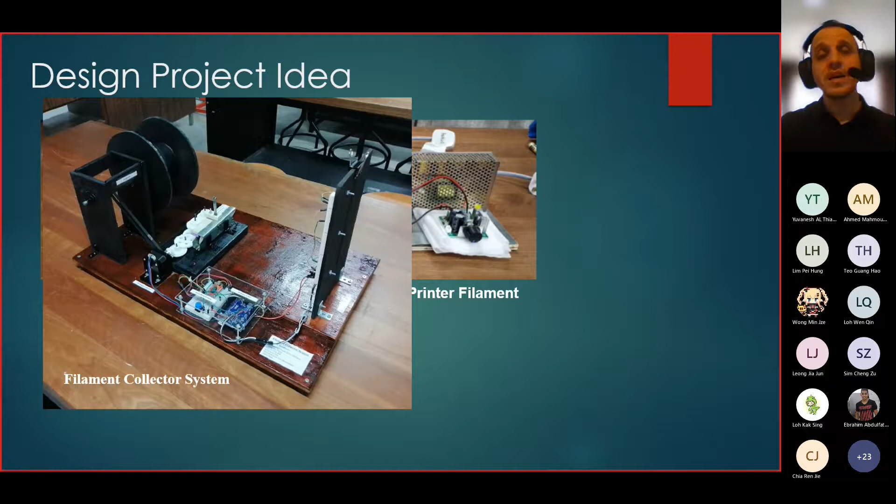Then we are going to replace it by another kind of cylinder. After that, we came out with the idea about the fireworks - this one came out when the fires happened in Australia, California, and several other cities in the world. So we needed to think about how we are able to control the fire, whether it happens in the home, in the jungle, or in other kinds of areas.

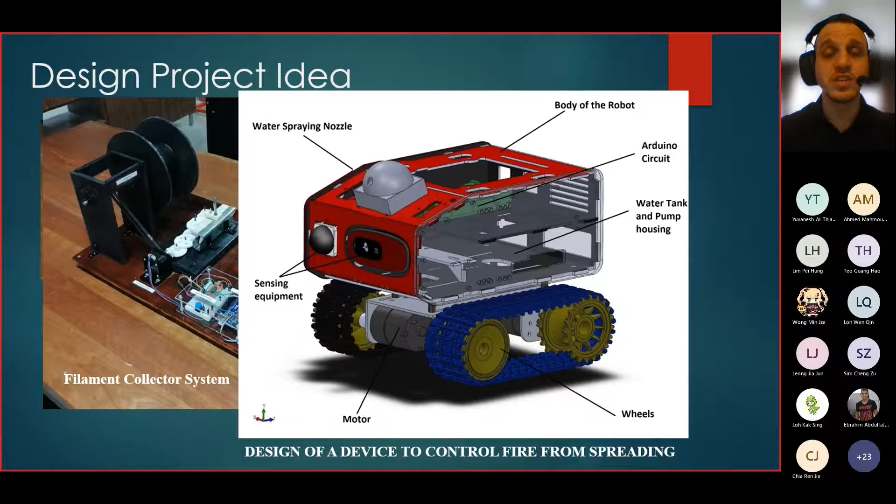So this kind of project, our industrial panel really liked it. They commented that this is a really complicated machine, and they are happy to see this kind of idea being run in one semester by our students.

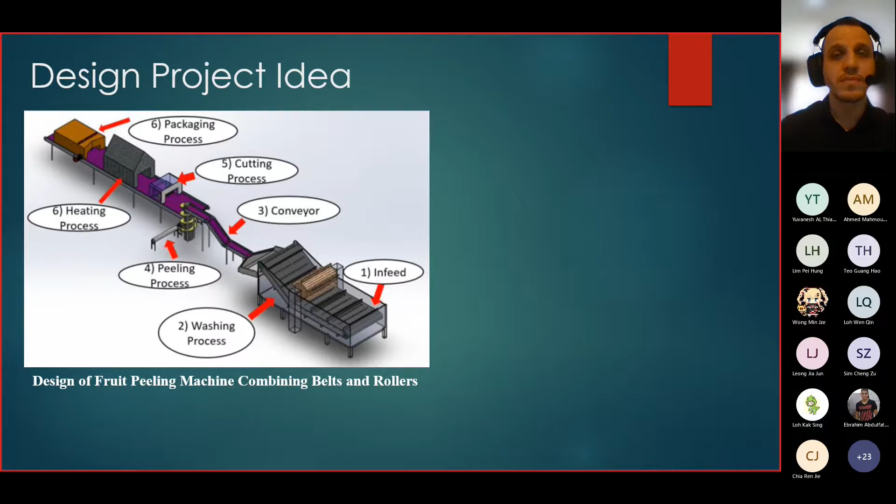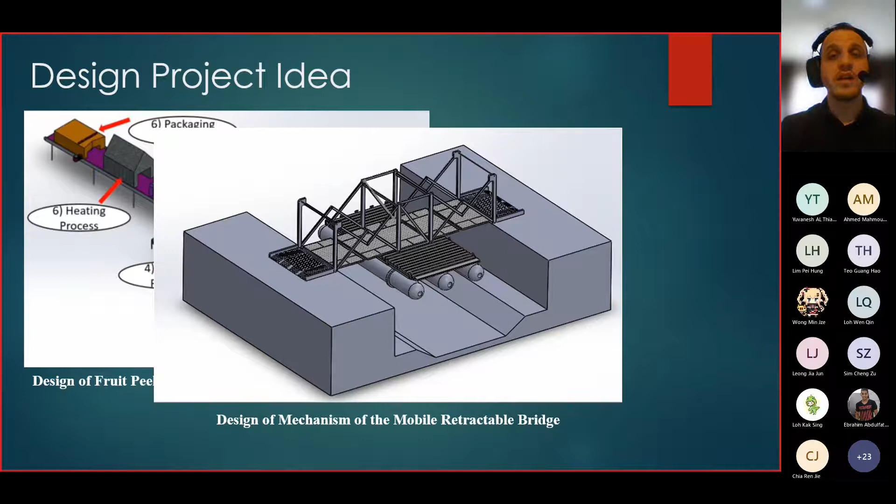Other than this, we found some organizations that were requiring designs from our university. This is the only design, the first one, which started last semester, where we came out with a real model for a real problem that this kind of organization was facing.

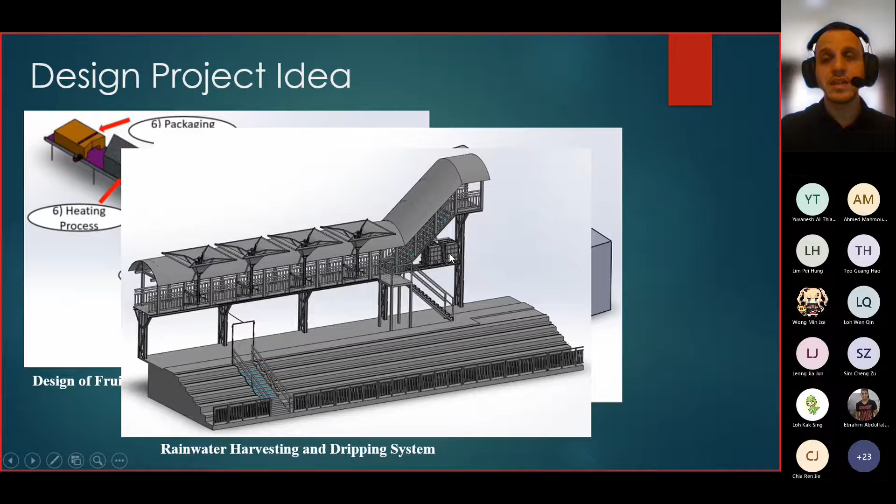So several designs came out from the students. One of them is an umbrella to collect water from the rain, and some came out with lines to be allocated beside the bridge to harvest all the water falling on the bridge. At the same time, this water is placed into two tanks, and at the end it's supplied to the land by a dripping system. So this is another idea, another design, as I mentioned. We got several designs and ideas, and the organizers were very happy with what the students came out with after completing the whole project.

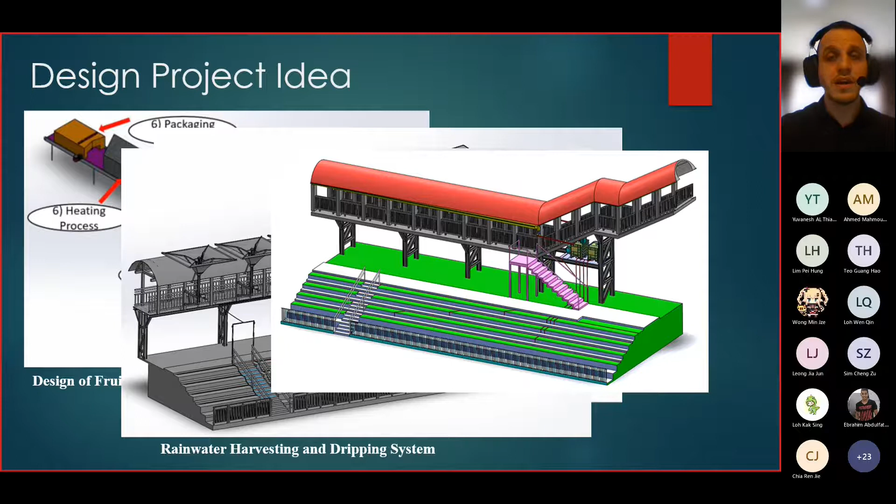After this, I'd like to show you some videos of what the students have done before. Later on, we'll explain the idea of the project and how students need to think between design, research, and several ideas. So let's start with this video. This one is about controlling the fire - sorry, before I start, this project is to control fire in the jungle or in the woods. All right, starting from the beginning.

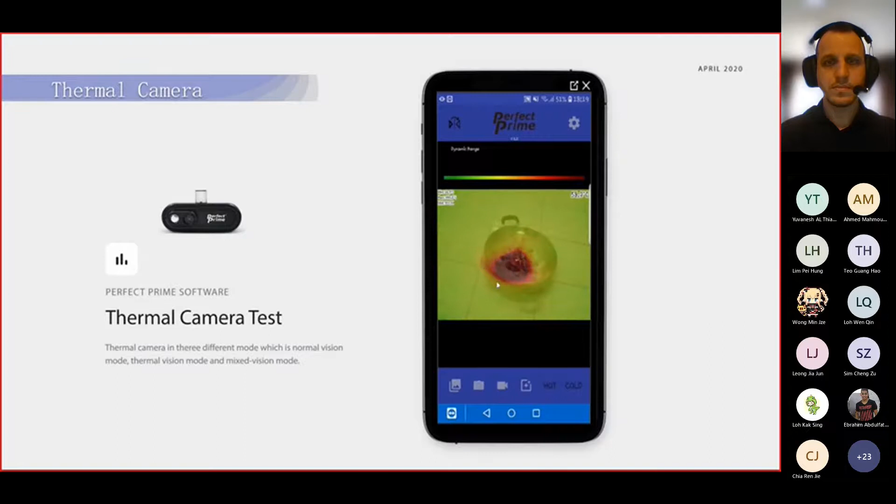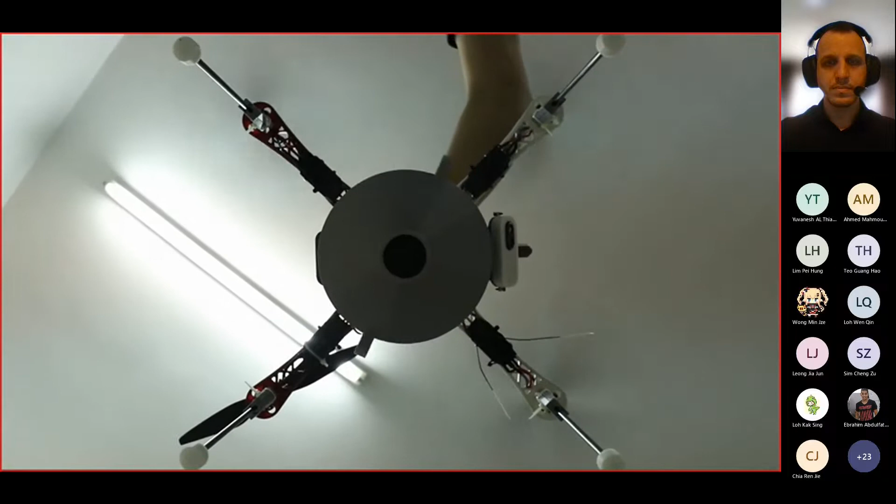This project was implemented in January 2020, before COVID started. During this semester COVID started, which was in March. As you noticed, there were only 2 students who came out with a prototype. Usually we ask students to come out with a prototype, but due to COVID-19 we stopped using prototypes in the design project and moved everything to simulation and modeling during the MCO. So there were only 2 students at home, and they managed to get all the product and came out with a design.

This design was more than expected, because the students came out with several ideas - they came out with 2 designs. One of them, if you notice here, let me go back.

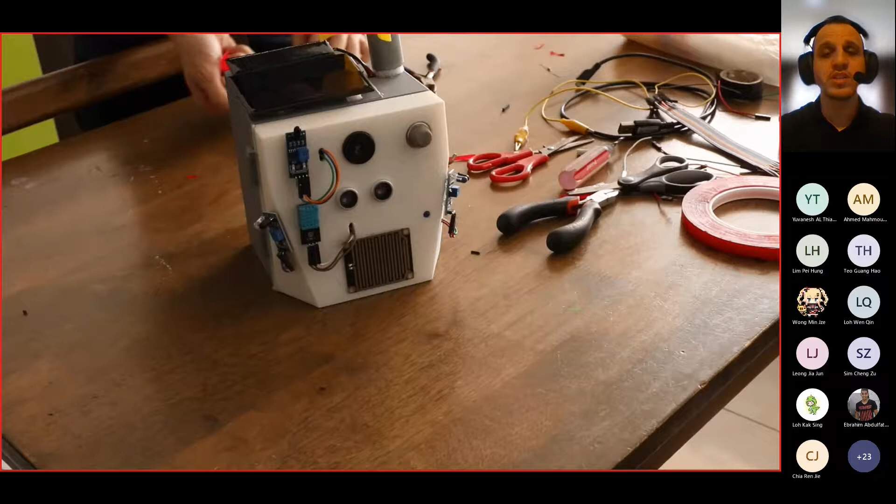This device is supposed to be allocated on trees to detect fire. After the fire starts being detected from several sensors, the firefighter, who is sitting a little bit far from the woods or jungle, will send the drone to the location of the fire. Then they will detect everything about the fire using the thermal vision camera. This way we may be able to control the fire in the whole jungle and solve the problem by saving the jungle and the people inside the whole area.

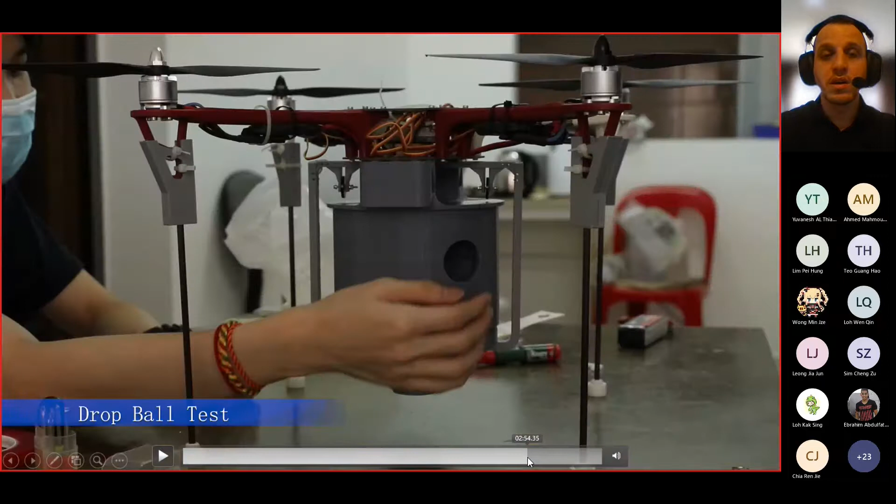This project was implemented beginning as mechanical parts, and step by step it's been converted to multidisciplinary - we came out with mechanical and some electrical sections, because we had to find coding for the sensors and so on. The students achieved a good goal for this project and came out with a great design. This device is supposed to be attached on the trees, as I mentioned earlier, so we may be able to transfer the drone to the jungle or forest. This is the great design we found from the students, and they really achieved the goal, more than their expectation.

Another design, from another semester, is about the retractable bridge. So let me show you the video.

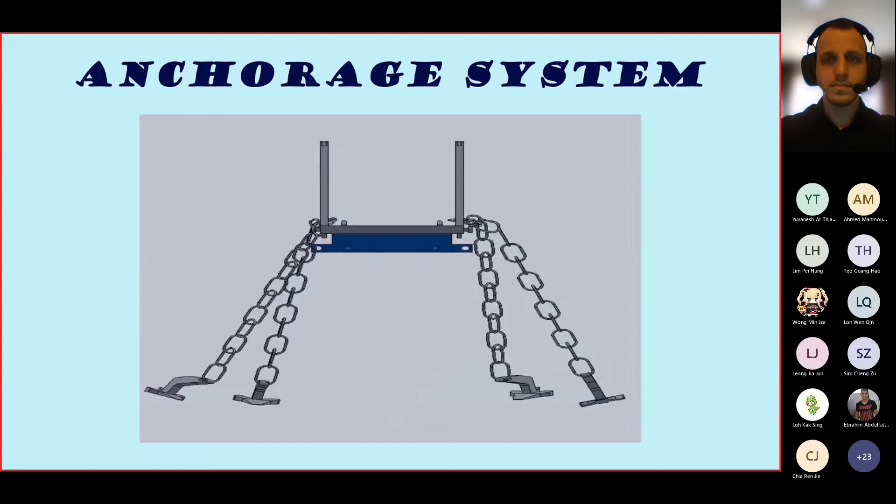This is one of the projects that has been applied to rescue people from the flood. And if you notice here, we have applied all the SOPs regarding COVID-19. So we need to find out how students are supposed to apply this information by applying sanitization on the bridge itself, then at the same time detecting the temperature for each person before crossing the bridge. We also need to provide social distancing between each member or between persons for the citizens.

In this part, you can notice that we are able to rescue the cars and at the same time rescue the people by applying this kind of bridge. This idea also came out at the department level, as we mentioned earlier.

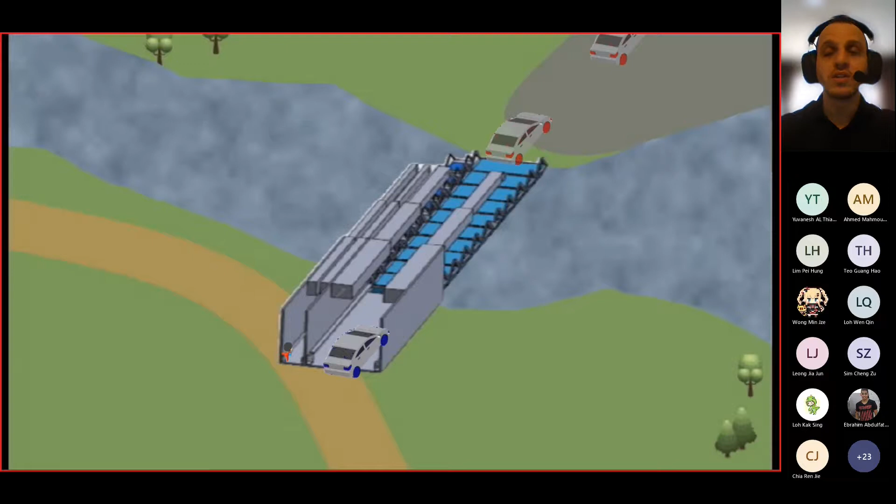The students achieved the goal with this design, and they managed to solve the problem with this kind of retractable bridge, because we may be able to use this mobile bridge from one location to another instead of applying a bridge on one side and then needing another bridge on another side. This idea really helps to move the bridge from location to location and helps save costs for the government or society running this kind of design. Other than this, we have another project regarding the peeling machine.

I'll just leave you with the video.

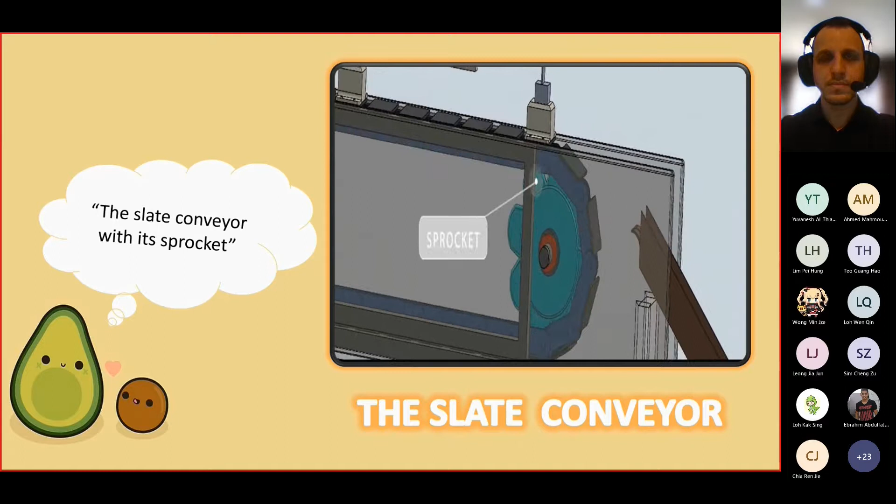This project was done in 2020. The students came out with several designs. Multiple groups came out with several designs because we had a lot of students, so I believe our groups were around 8. Each student selected a different fruit.

If I'm not mistaken, Mr. Renji is with us today. One of your seniors came out with one of the designs for this project. If my memory serves, they came out with an avocado machine, a peeling machine.

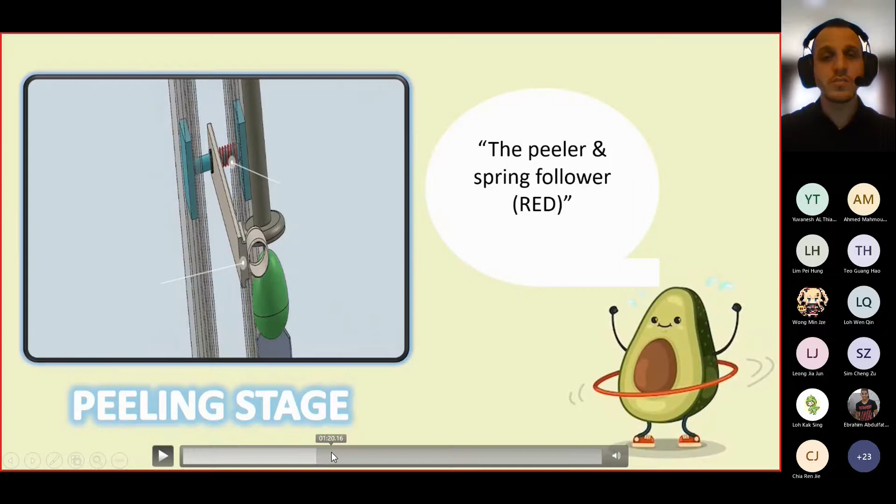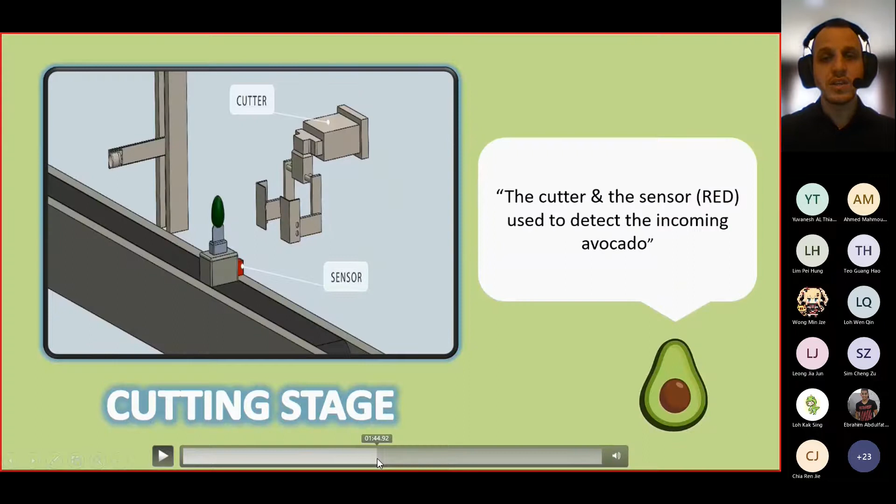This kind of project has several stages, as we mentioned earlier. As we explained, it starts with washing, then moves to the loading stage, then moves to cutting and peeling. Then after that it moves to the cutting area, then removing the seeds, then moving to packaging. So all of this comes out as a factory outlet for peeling any kind of fruit.

This project really achieves the requirement of the idea from the students. Definitely, they came out with several designs - every group came up with around 3 or 4 designs. Then at the end, they selected the best design, and from this they managed to show the idea using this kind of video.

Now I'm going to move to the last video and explain the ideas here. This project is the latest one, happening in May 2021 - about community service for the Mid Valley area. I'll leave you with the video.

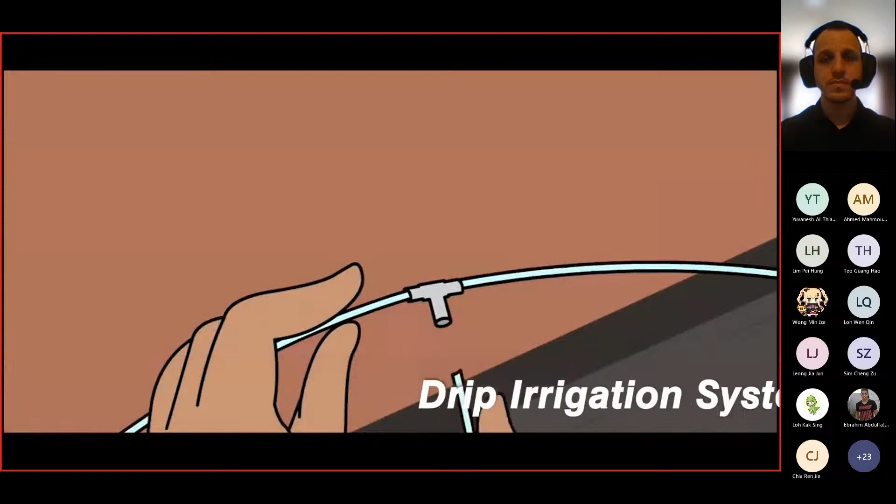Hi, today I'll be presenting our design of a plant irrigation system that integrates rainwater harvesting and drip irrigation. This design will be implemented at the site at Mid Valley River Tree. Without further ado, let's get started.

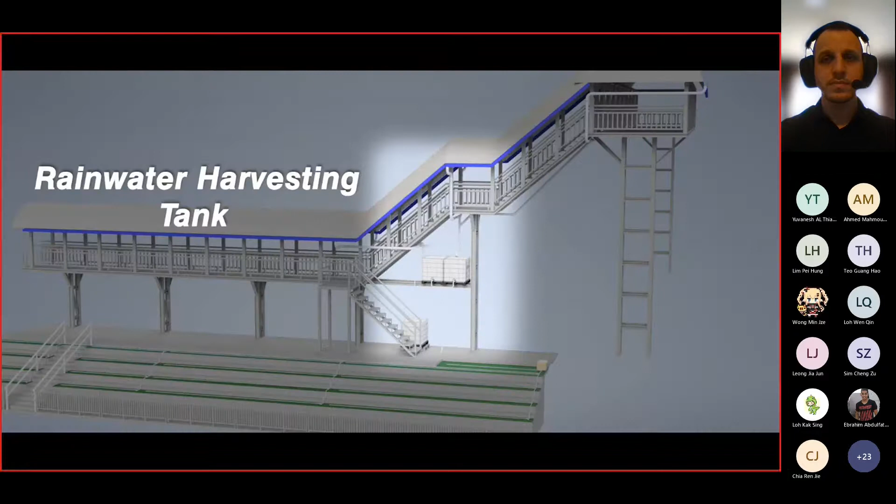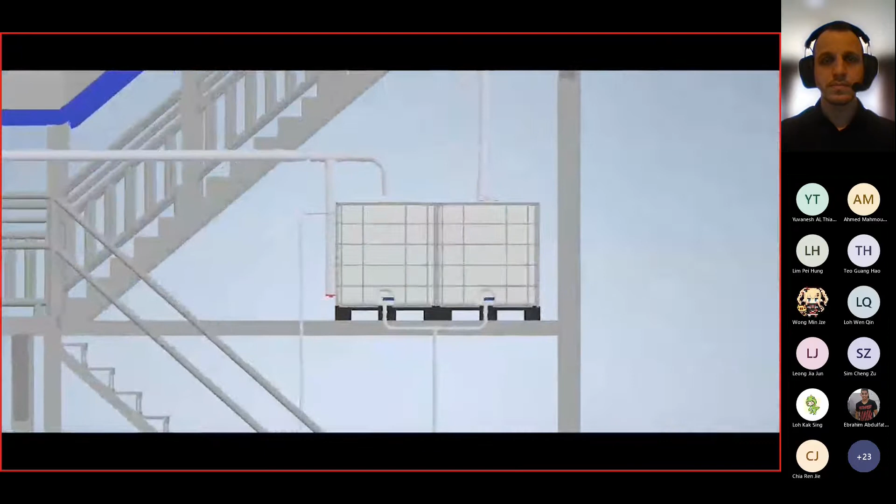Here you can see the placement of tanks on a beam and the layout of drip irrigation. Looking closer, we have rain gutters installed along the bridge that can capture up to 2,800 liters of water. It also comes with a first flush diverter used to capture leaves or big particles.

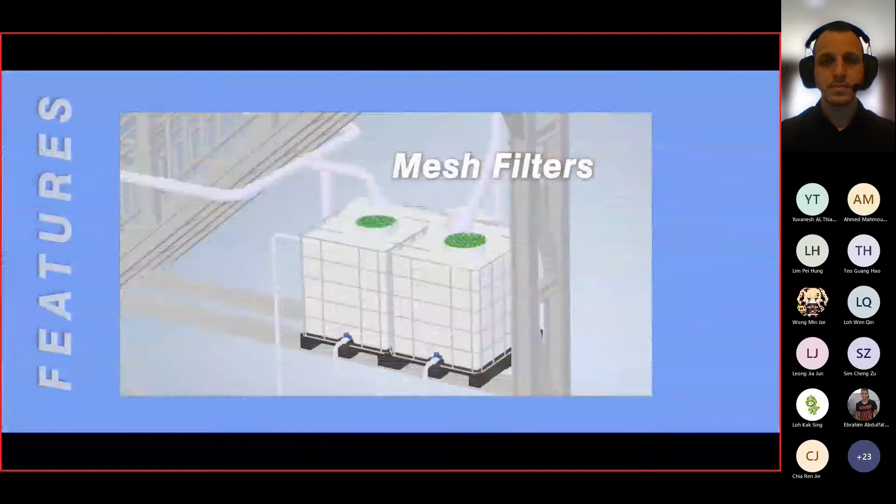Also, we have a mesh filter at the inlet as a second filtration. Here you can see how the water is filled up. The upper tank will be used for irrigation, while the bottom tank is used as storage and can be utilized as a washing facility.

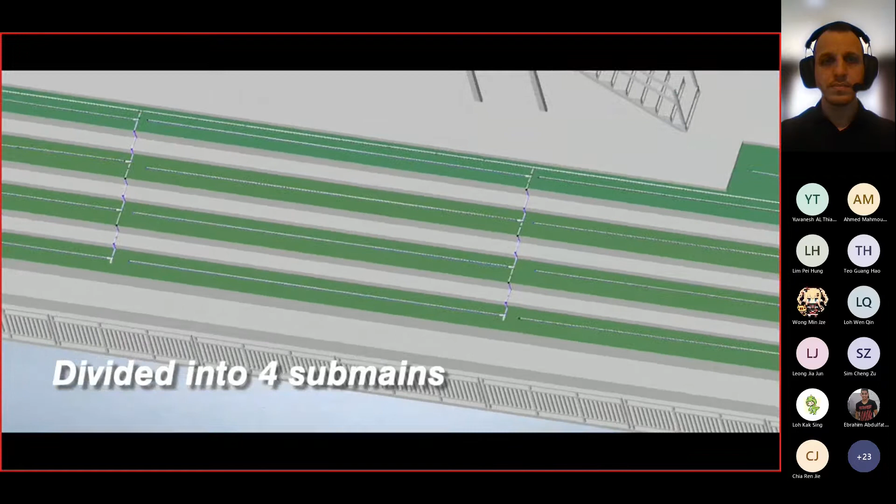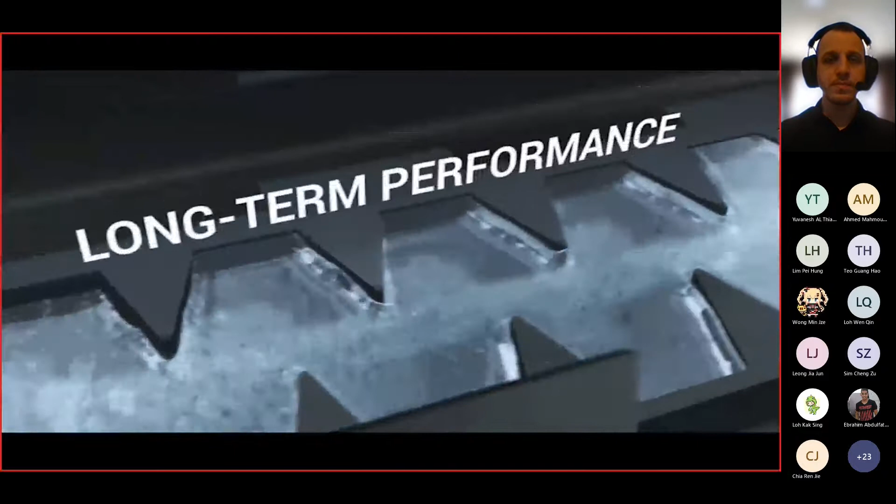Moving on to drip irrigation, we are dividing the drip lines into 4 zones. This helps ensure uniform flow rate throughout the system. We are also adopting PC emitters from Netafim, which have a labyrinth design that reduces water pressure and ensures uniform delivery of water to your plants. To maintain uniform irrigation over time, a dripper must be resistant to clogging. In this case, the dripper has a self-flushing mechanism that helps flush out debris.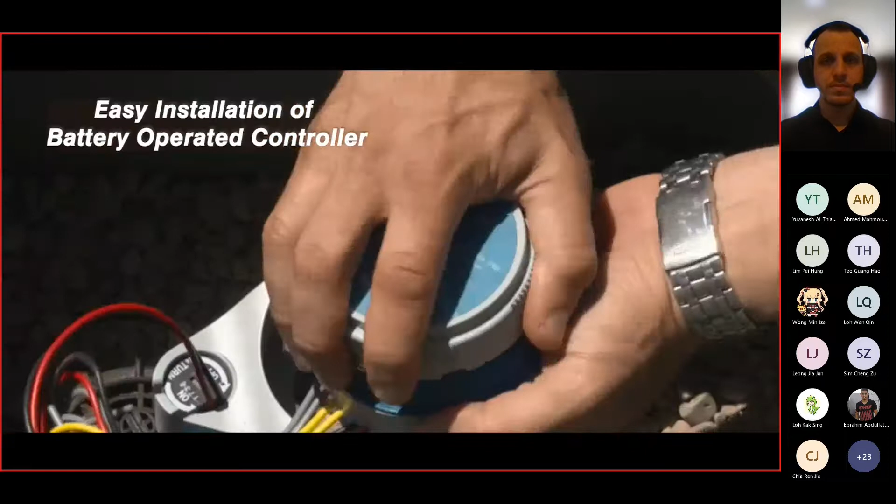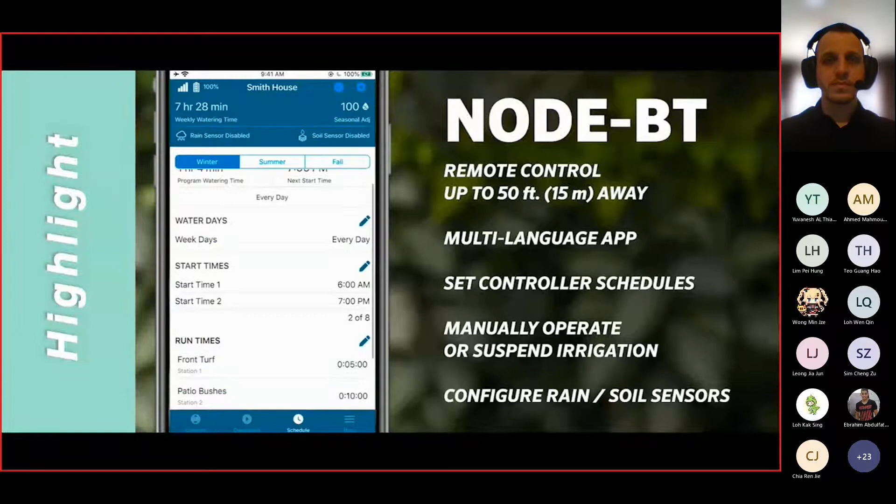Here comes the interesting part, the Bluetooth-enabled controller. You can install the Node-BT app on your smartphone to control and monitor from a distance up to 50 feet away. From this app, you can manually operate or suspend irrigation, configure your sensors, and view your battery health.

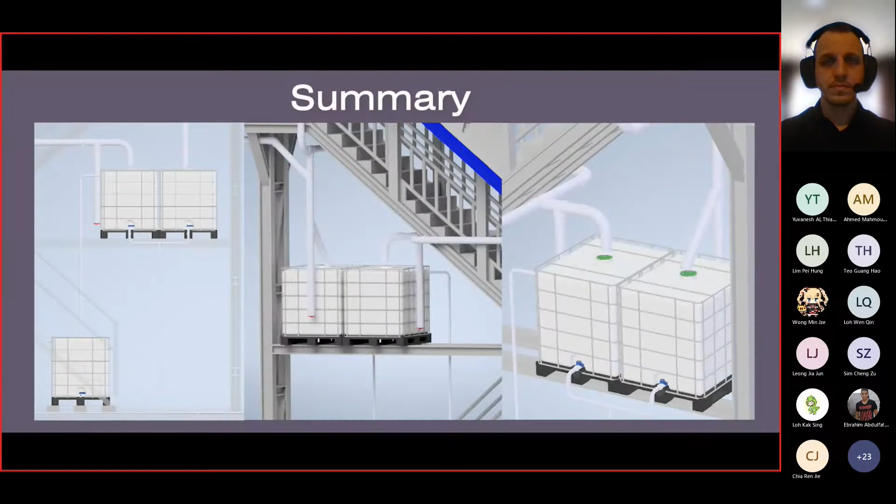Before I end, here's the summary of the features of our design. It is effective, sustainable, and most importantly caters to all your needs and will be a perfect solution to all your concerns. Thank you.

So this project, as we mentioned earlier, has happened in the Mid Valley area, but we didn't implement it as a real prototype or model there, as we are still waiting for the fund to come out from the organization to apply this kind of project.

There are several designs that came out, around 15 designs from the students. Each design has a different idea. All of them were perfect to be implemented at any kind of location, but definitely we may need to pick the correct and suitable one for the site.

So this kind of project has been worked on. Let me go back to the site. Yeah, this is the site, how it looked like.

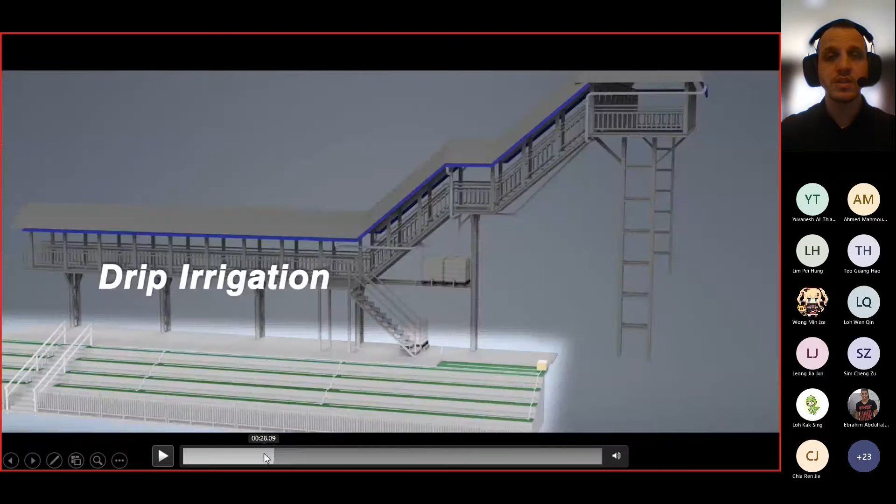To come out with the idea, you may need to think what is a suitable idea: cheapest cost, proper design, sustainable design, not hazardous to the environment. It is really supposed to be applicable and easy to use. This kind of idea you need to put in your mind before you come out with the design.

So in this case, you may need to find out what stages you need to move through to come out with a finalized design. Definitely you will not pop up with the best design right away, as I mentioned earlier. You are going to come out with the first idea, then second, then third, maybe fourth, fifth, until you feel okay, this design is totally different from what is available in the market.

So from this, we can differentiate between our work and the existing work. And how do we make sure this one is achievable?

We have several criteria or ways to test it, either by using simulation, or we can build a small prototype to test the whole idea. From this, you will be able to feel, okay, this kind of project is able to be achieved.

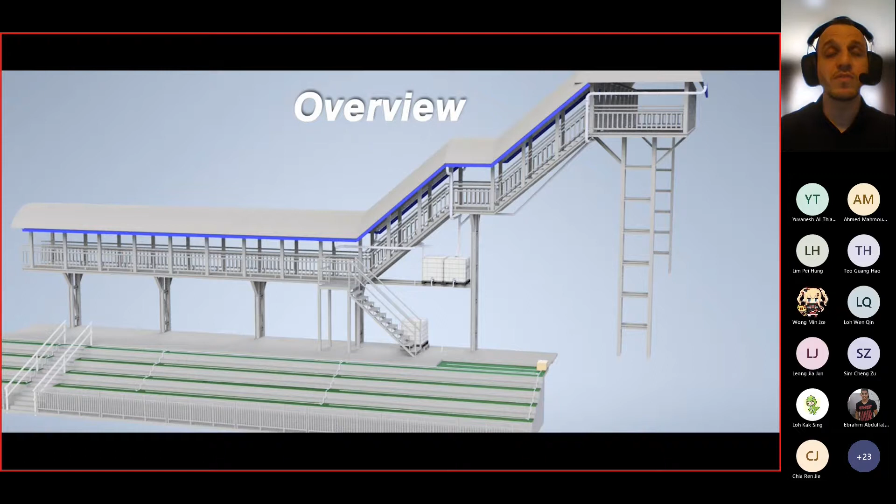So this is the difference between the final year project, which is fully by research, and this one, which is only about the design, the idea of design, and how to sell it in the market by applying this kind of criteria, for your information.

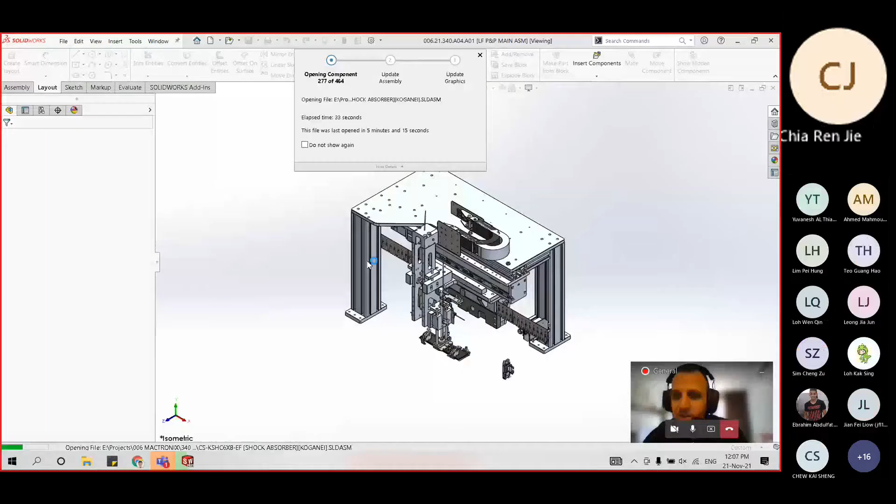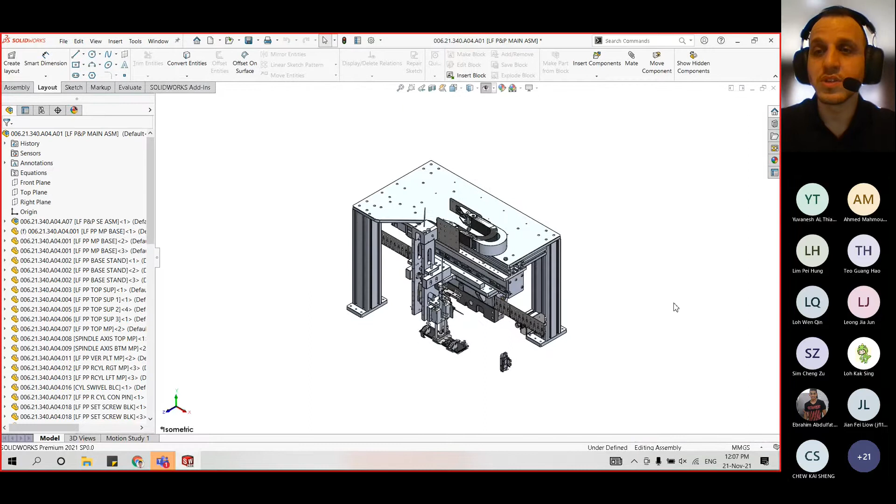Eliza asks, would there be any additional course where we can further learn the software SolidWorks? Yes, definitely. You'll go through AutoCAD with the design project, engineering graphics and design, and SolidWorks with mechanical engineering design in year 2. Then ANSYS is for year 3 or 4, the finite element course, which I'm going to teach you as well. So you'll learn all these features of these software, and you can also use outside sources like articles or YouTube, which will help you a lot.

Ren Jie, thank you, go ahead. All right, I'm sharing my screen right now, so I hope you guys can see it. Yes, okay. Dr. Gani, you can see it, right? Yeah, go ahead, perfect.

I'm gonna make it short. Capstone is very useful for our future as a designer, and that's one of the biggest reasons I wanted to become a designer. To answer a common question, a lot of people ask me, is it very hard to start a design? It depends. As Dr. Gani mentioned earlier, every single design starts with a simple sketch. You can't complete something really great within one day. Everything must be done completely from zero. Start your own research, then slowly progress to develop the thing that you want. That's a really important fundamental that all of you should know.

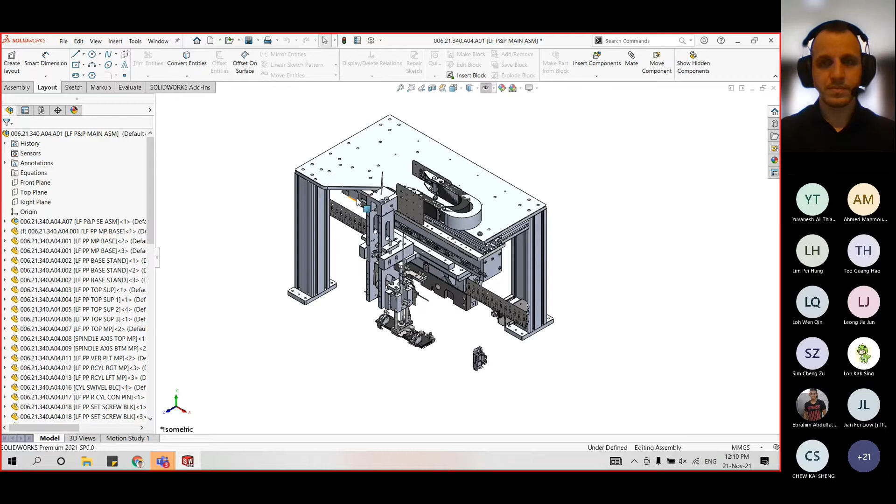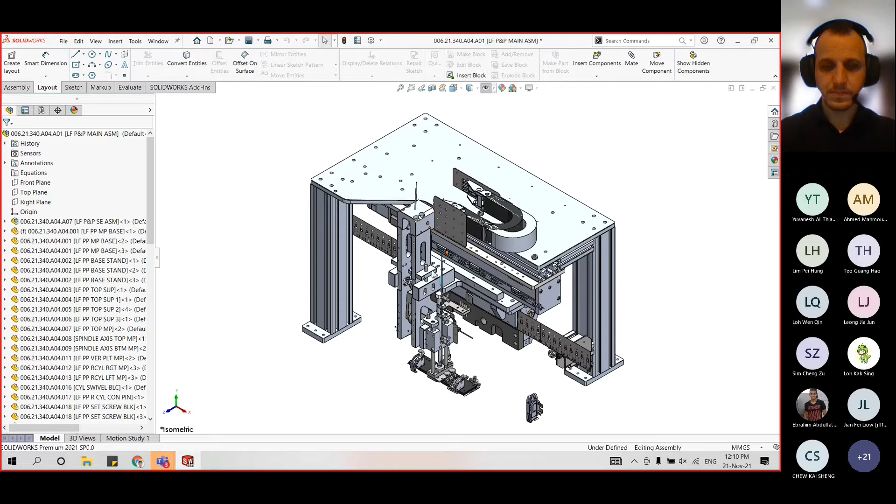Secondly, coming to the design, right now you guys are doing the capstone, or rather, maybe next year for year 4 students. Of course you don't have to design something like what I'm showing right now. This isn't really sophisticated, but it's something that managed to be fabricated. As an industrial guy, what we're looking for in students is actually their idea. I'm not asking you to know every single detail of the machine, that's impossible. But one thing I'd really suggest is to try to understand or find out the brand of each component. For example, we have a cylinder here, called a mini cylinder, and the brand is called Airtac. What is Airtac? You're going to find out yourself, it's a company which produces all types of cylinders. The cylinder I'm sharing right now is called a pneumatic cylinder.

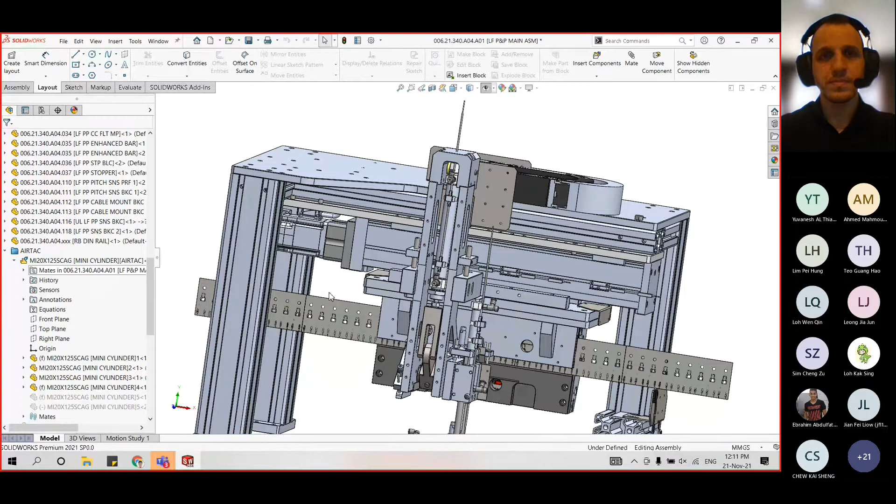Okay, so definitely you have to know this, don't be like me. The first day I started, my boss asked me, can you help me find out this cylinder? And I was like, what cylinder do you want? It's kind of embarrassing, but anyway, I managed to overcome it.

And secondly, we have linear actuators. You're going to find it out, you're going to study a bit, spend some time, half an hour. What is a belt drive linear actuator, ball screw linear actuator? And then all those sensors.

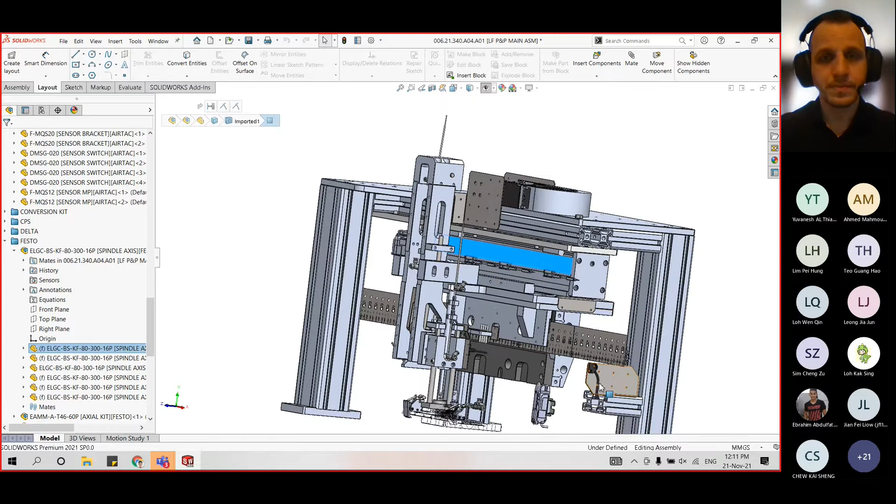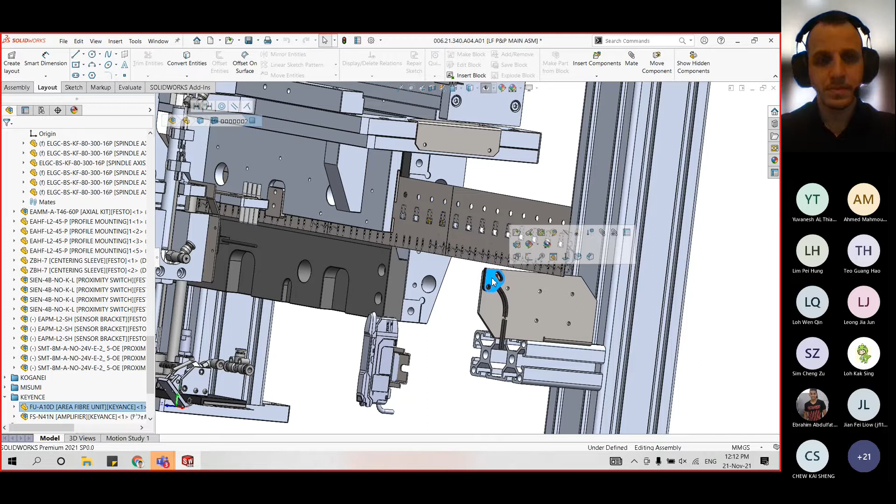Try, as a designer or as an engineer, when we call the sensor, don't just say it's a sensor. What type of sensor is it? For example, this one, the highlighted one, this is a fiber sensor, a reflective fiber sensor. So I hope you understand what's the function of a sensor. We have ultrasonic sensor, photoelectric sensor, fiber sensor, and then laser sensor.

I hope next, maybe in an upcoming design, you guys know what is aluminum profile. This is really important because if you go to all the websites, for example, if you know about Genetec, it's a really famous company in Malaysia right now who helps, I think, one US company to do their electric vehicle machine. They are fabricating the electric vehicle machine and selling this machine to the US company to help them manufacture their EV car.

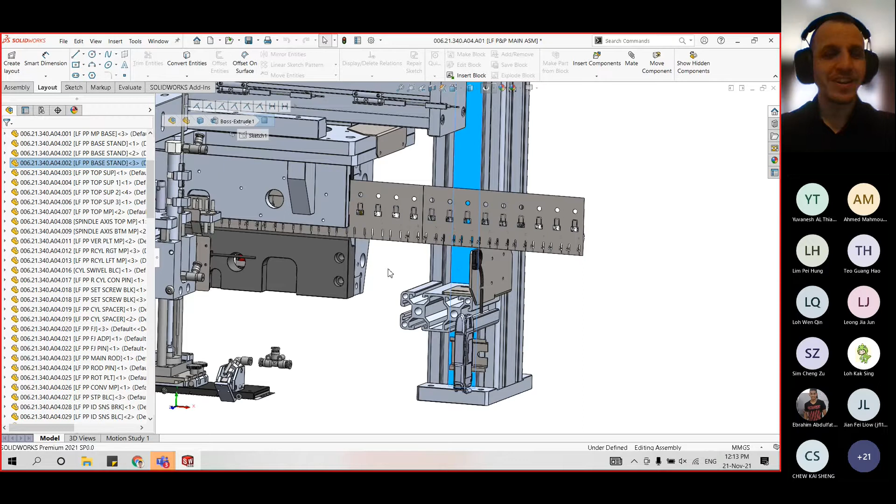All right, thank you Renji for your design, definitely it's really interesting. I just would like to ask you one question: did you find out in your workplace that what you've done in your capstone is really useful for your workplace? Yeah, of course.

One thing I would like to say, the most important one is how to organize, how to manage. My boss, or my leader, said to me, I don't have strong technical skill, but at least I managed to capture what he said fast. You have to try to understand what your peers and other colleagues are trying to convey to you, and then you have to capture it correctly and convert it to a design. That's the main thing as a designer.

That's what I am always focusing on, guys. The most important thing is you may need to learn things very fast, and you may need to work with some people that you don't feel are really your colleagues. Later, you may need to learn from them, but at the same time you have to pass them in knowledge, because you have to prove yourself that you are really suitable for this position, and this is very important. I believe Mr. Gibson has already explained the idea for all of you, and he has shared what he is facing during his design and how the technical part he needs to absorb very fast to reach the level of his colleagues, his seniors. Thank you, Gibson.